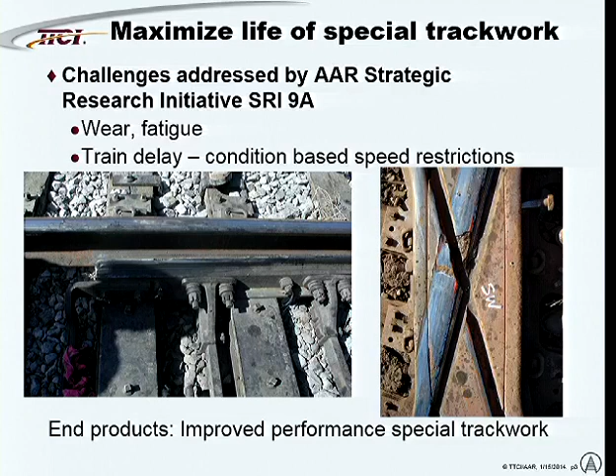On the safety side, special track work is typically the third leading track-related cause of accidents. Number one is typically rail flaw failures, and number two is general track geometry. Special track work is number three typically. And so we see

failures that are related to the operation, the moving parts of the turnout, and then also materials issues. These components tend to be highly sensitive to dynamic wheel load. So this is an area where the railroads do spend a lot of money, typically more than $1 billion a year in the U.S. alone.

Unlike some other areas, the pie is divided up into three main pieces. You have the direct costs of purchasing new components, the capital costs. You also have a large maintenance component. And then in addition, we have a train operations or train delay component, which is fairly significant in this area and may not be in some of the other track component areas.

So in general, spending north of $1 billion, and maintenance and train delay more than half of the total. So just buying the best components is essential, but is not sufficient to have a cost-effective operation.

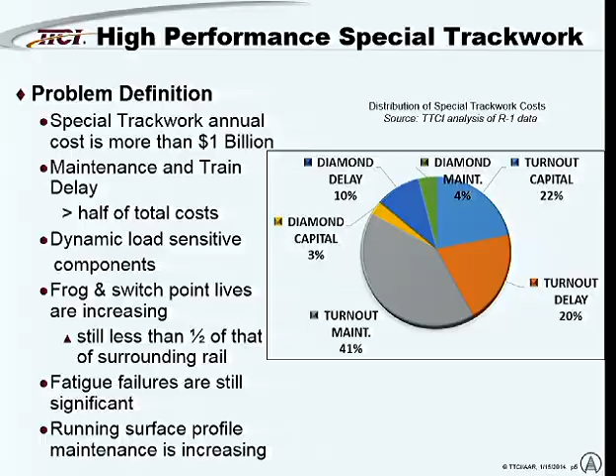So every few years we survey the railroads and we look at how various track components are performing. In this case, we looked at turnouts. And from that, we determined what the major failure modes were at the time. And then we began to address those with our research program.

So this is obviously a potential safety risk because a wheel coming along can actually climb that switch point, and the flange can get in that notch and more easily climb out, causing an accident. So this is a major issue for the railroads.

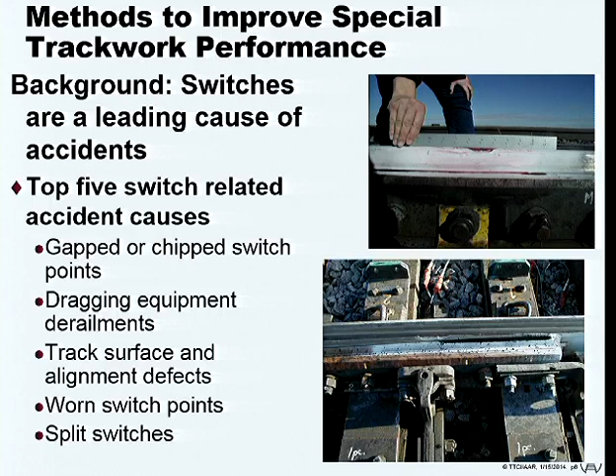And then worn switch points, again, we can get wear so that the contact with the wheel is such that it facilitates a derailment. So there should be wear limits on switches, and those are now difficult to measure in the field. And then split switches. This would be a failure of the operation of the switch to fully close to one alignment or the other. And so that can occur. That's usually a yard type derailment.

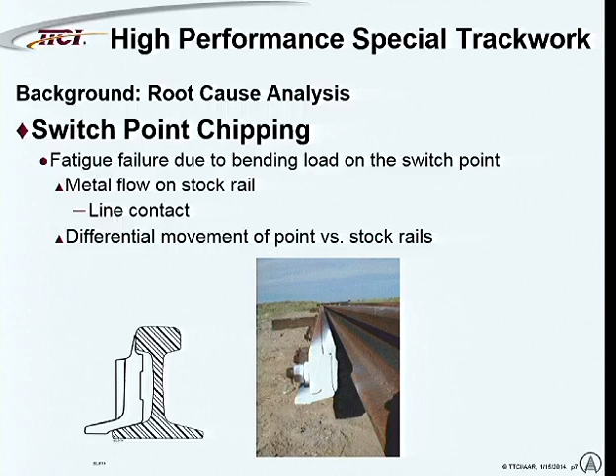Shown in the middle is a great innovation in special track work of many, many years ago. It's a Samson undercut type switch point. So the tip of the switch is a lot thicker. And we've removed metal from the stock rail to accommodate that. But still you can see where this is a delicate component, if you will, for a heavy axle load freight operation.

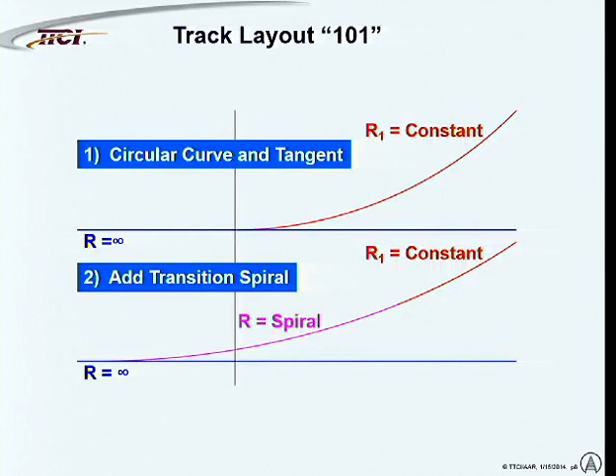So what do we do on turnouts? Turnouts, we do the opposite. We offset the two alignments in North America. The typical AREMA switch has the alignment of the curved portion of the turnout actually outside of the tangent alignment.

Why do we do this? Well, it makes for a much shorter turnout, and it allows the switch point to be robust, thicker, so we don't have to machine something down to a couple of molecules wide. For manufacturing reasons of 100 years ago, this was a good idea.

The resultant is that you get a switch that has a kink or an alignment defect, if you will, right at the point of switch with an entry angle that's fairly large. And that large entry angle causes us some issues in terms of performance of the vehicles going over the turnout.

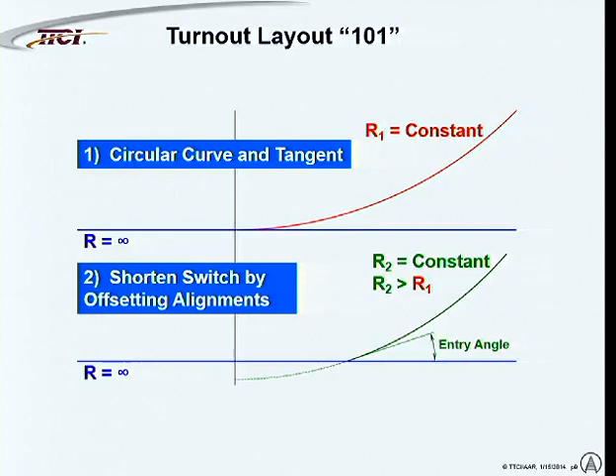Also, in a turnout, we typically don't have super elevation that we would have in the rest of the curves out on the railroad. So for those reasons alone, turnouts tend to perform pretty poorly as far as vehicle dynamics compared to the rest of the railroad.

That results in quick wear and fatigue of that switch point, and thus some of the damage we saw on the earlier slides. We can fix this with better alignments, and that's what the industry has looked at in the last few years.

The sticking point is that, believe it or not, we rate the turnout for speed based on the steady state curving force that occurs behind that entry. If you make the entry angle smaller, you make the radius of the curve behind it smaller for the same length turnout, and thus you have a lower allowable speed, even though it's a better performing turnout.

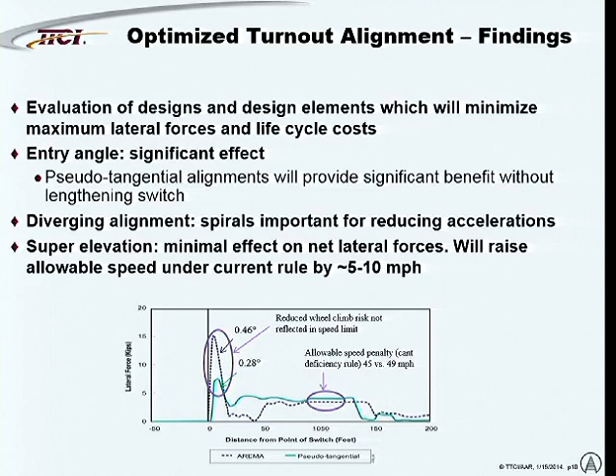So for some regulatory issues, this has inhibited the use of better switch designs and turnout alignments in North America. Our company and the various Trackwork suppliers have looked at how to improve the performance of switches by lowering the entry angle, and various things have been implemented.

Use of spiral geometry, use of the so-called pseudo-tangential turnouts, which follow an alignment just like the rest of the railroad, where the curve and the tangent are aligned, they're tangential. But then you just chop off the end of the switch point when it gets to be a very thin section. Those work very well.

There are limitations, though, that are practical limitations. Shown here on the slide is a number 6 1/4 inch heel spread, which would dictate the length of that switch point. There are practical issues on transporting a switch point when they get to be more than about 60 feet, so we're kept in a box where we can't have a switch point much longer than 60 feet if you're trying to transport it to a remote location.

So there are a lot of design limitations on what we can do, but the bottom line is anything we can do to make the entry angle smaller at the beginning of the switch will provide for a much better ride and typically longer-lived components.

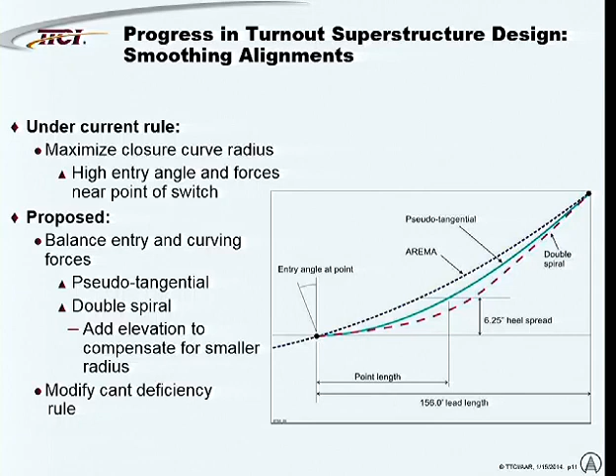We've also looked at revising the stock rail. If you look at switch point chipping carefully, it's really related to deformation of the stock rail, the matching stock rail. So we've looked at ways to revise that profile on the stock rail to minimize metal flow under traffic. We've also looked at revising the switch point running surface profile to make it look more like the rest of the railroad, having the shape of a worn rail, and that's proven to be quite effective. We've also looked at ways to alter the switch alignment so wheels don't come in contact with the thin section of the switch point. And finally, one that's a little out of the box, we looked at how to eliminate the switch point entirely from the mainline route of the turnout.

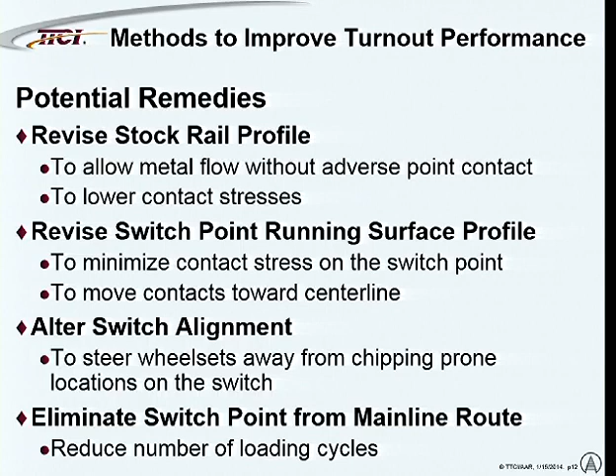A little bit more evidence of that. With the help of various railroads, CSX and BNSF in particular, we went out and measured many worn switch points. I don't know if it shows up too well in the photo here on the left, but that's part of the switch point up there, and then it's broken out from there going forward. It's pretty much all chipped out here. This is in a yard application. We measured many profiles.

Profiles on switch points and stock rail pairs matched up. I've offset the stock rail in this case, but you can see this would be a time series or distance series of switch point profiles on a switch such as this one - I'm not sure it's this one exactly. But the thing we tumbled to after looking at a lot of these is they all break at the same height, all switch points, no matter what thickness it is. And why does it do that? Well, that's where the flow on the stock rail is making contact. So it's really flow on the stock rail which is causing a lot of our issues with the fit up of the switch point and the adverse bending stresses that we see.

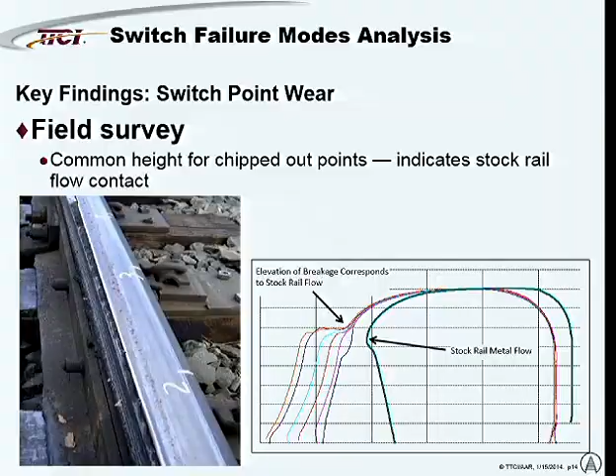So the fix there is to allow some wear in that matchup of the stock rail and the switch point.

We also looked at rolling contact fatigue on switch points. What we see is that typically in this transfer zone, where the wheel is transitioning from the stock rail to the switch point, we get a lot of rolling contact fatigue. The vehicle's trying to steer there, suddenly changing its contact location from stock rail to switch point. So this is a very severe service environment for the steel in this area.

In addition, we have a legacy issue in that switch points were machined, planed from full section rails. They're still made that way, but typically with a CNC type machine rather than a planing operation. But in the good old days, a planing operation made sense, so a simple profile was all they could accomplish. They would basically give the rail a flat top haircut here, giving you this nice flat surface that would quickly deform into something that looked more like the red line on the upper plot there.

In doing that, we're doing a lot of work and removing a lot of material from wear under load. So if we start with something more like this, we see that we have to do a lot less maintenance grinding, and we can delay the onset of rolling contact fatigue - spalling, it's sometimes called on the railroad, the head checks. We can delay that by a significant amount of tonnage.

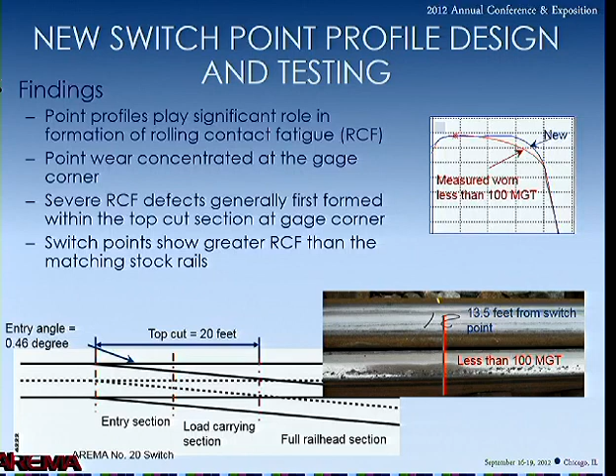And so we came up—we being the industry, our company led the effort, but we worked closely with our colleagues on the railroads, the track standards engineers, and also the suppliers. We came up with a profile that tries to match a worn rail. Most rail sections have a three radius corner by design, and then a 78-degree side slope that matches the wheel flange.

We thought that was a bit much ambition for the first step, so we came up with sort of the poor man's approach to that. We only had to buy one cutter to do this, so we came up with a 1-inch radius corner.

To show you the law of unintended consequences, we gave this sketch to the supplier, the manufacturer at Progress Rail. We said, we want a 1-inch radius, but we want a discontinuity here, however you need to come in and touch grind that to smooth it. Well, they took our instructions and said, oh, okay, we can rotate that 1-inch radius, we can move the center of that curve, and we can actually make it a nice smooth corner. Well, that kind of ruined the design, but they thought they were making an improvement for us.

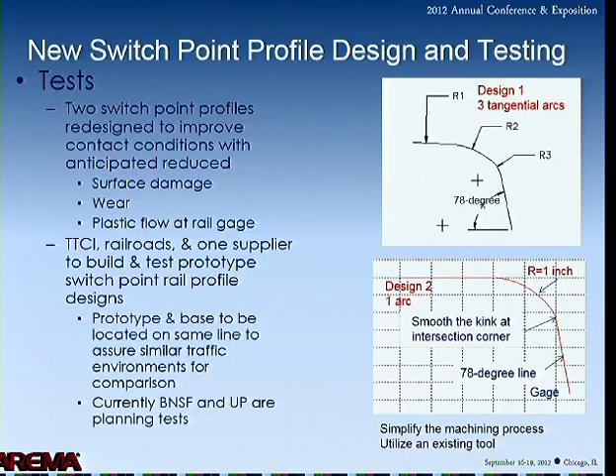Anyway, with the help of BNSF and UP, we were able to make some number 20 switch points and put them in mainline service. So I got to go to some exciting places like Marceline, Missouri, and Bonner Springs, Kansas, to test these out. This is on the Santa Fe Transcon, a crossover, number 20 crossover.

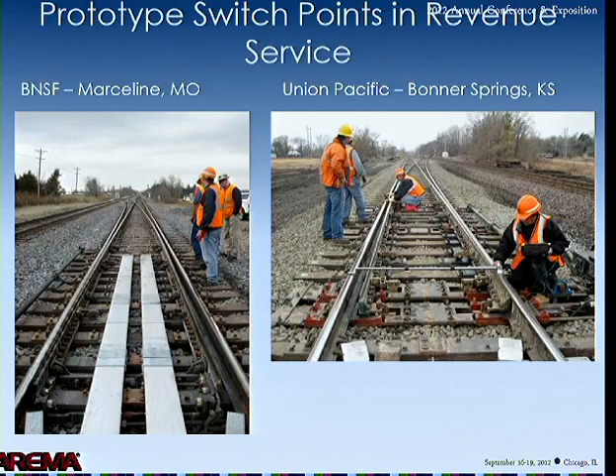This turnout had the revised profile, and the other one had the railroad standard profile at the time. Same thing at Bonner Springs. UP actually put in 2 sets of crossovers, one each with the new profile and their existing design. So we went out and periodically took measurements using a digital profilometer, a MiniProf, to measure how those switches were wearing.

What we found was quite encouraging. Shown on this plot, we've got the new profile, and then after a fair amount of tonnage, 30, 40 MGT probably. And then here, this was one of the standard ones, comparing how it wore over that same tonnage interval. So you can see a fairly significant improvement in the wear on these components. The scales here are millimeters on both axes, and the bar chart kind of sums it up. The prototypes were wearing less than half as much as the standard profiles.

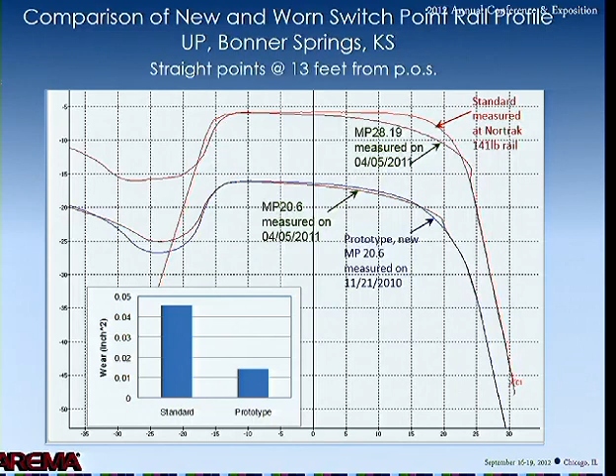Also encouraging, the contact is where we want it. On a typical switch point, it's right on the gauge corner, and that's a very high contact stress. In the new profile, it's on the top of the switch point where we want it, and that causes less deformation, less warping of the switch point under load, and also lower contact stresses.

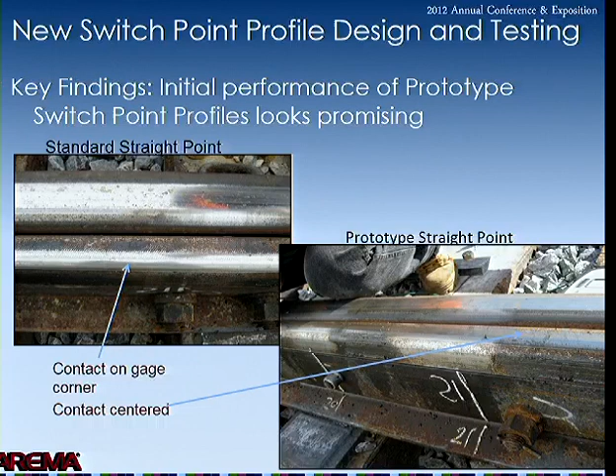The standard points started to show rolling contact fatigue after about 100 million gross tons. I apologize if you can't see it in the picture, it's kind of in the shadow part there where you see the typical spalls—a lot of people call them spalls out on the railroad. And the prototype looked pretty clean in general.

This is not 23 feet back in the switch—this is measurement location 23, which I think is around 14, 15 feet.

Dave, just to confirm, those are both in the same crossover? They're just two different turnouts in the same crossover? They are, yeah. These are the ones on the BNSF at Marceline, Missouri—boyhood home of Walt Disney.

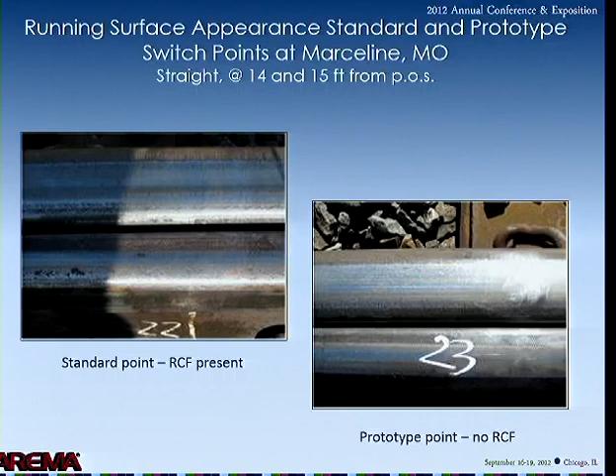All right, so moving on. Conclusions: a simplified profile works pretty well. This was presented at AREMA in 2012. Significant reduction in wear that continues to today—we're out a couple hundred MGT on these now.

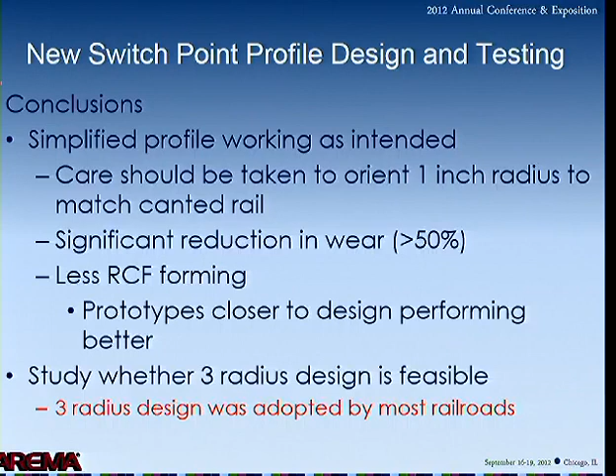The prototype that was closer to the actual intended design worked pretty well. In 2012, the railroads were studying whether the 3-radius design is feasible. The answer is yes, and virtually every railroad uses that 3-radius design today. So that's become an industry standard.

Next, we'll talk a little about vehicle dynamics. So we're looking at ways to avoid the wheel flange coming in contact with the thin end of the switch point. This can be accomplished in several ways. One way we looked at was modifying track gauge so the vehicle steers away from either switch point, depending on which route you're going down.

We were able to do this by lengthening the switch points so we get the wheels on the switch points before the point of switch. Typically a switch point starts at the point of switch, shown here in this drawing. What we learned is that if we get the wheel set on the switch point earlier, we can control it better, and by manipulating track gauge with small changes, we can make the vehicle steer the way we want it to, steering away from the switch point with lower forces as it encounters it.

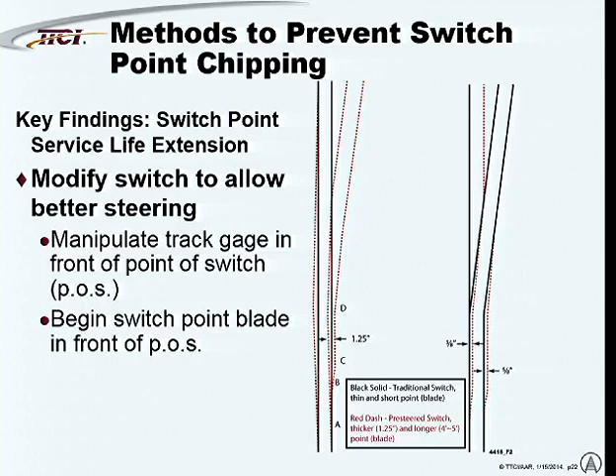Here's a slide I hope will show what we're trying to accomplish. Our wheel set has a solid axle - this is not your car with a differential. So how does a vehicle steer? How does a wheel set steer? Hopefully we have a cone-shaped profile on the wheel, and so the wheel set can steer by shifting laterally within the gauge of the track. We're trying to apply that concept to our turnout.

By moving one of the rails out, we can get this wheel set to want to steer back in this direction to the right, because as that axle makes a revolution, the radius on this wheel is bigger than the radius over here. So for every revolution down the track, this wheel is going further than that wheel - it's steering to the right. By manipulating track gauge in the turnout, we think we can steer away from the switch point tip on either side.

We've modeled this, and then measured the actual performance. Shown here is the modeling. The part we're trying to affect is where the switch point begins, where you see this big lateral spike - this is actually a wheel set angle of attack. The difference between conventional and our design is this little piece right here. We're just barely getting the wheel set to have a negative angle of attack, away from the rail, and by doing that we greatly reduce the wear and forces in that area.

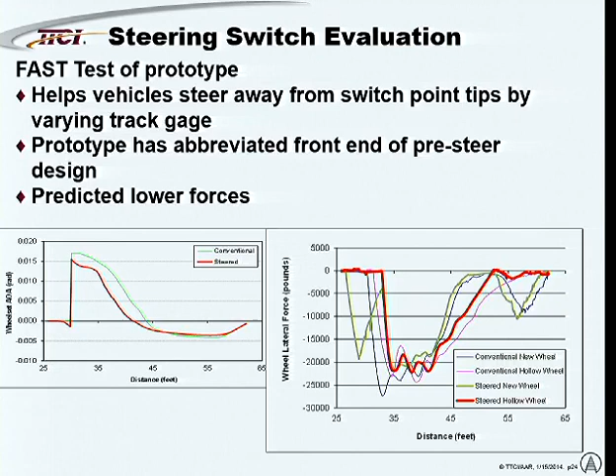The good thing about this is it seems to work for a wide variety of wheel profiles. We're able to get a benefit for the typical worn wheels out in track, not just the new AAR 1 in 20 tread type profile.

So complications - how can this go wrong? Well, the wheel set is doing its own thing, oscillating within the gauge of the track as it goes down nice nominal tangent track with good wheel sets. The individual wheel sets do this, damped out a bit by the truck, the fact that we have two wheel sets coupled together through a truck structure. But how this can go wrong is if our switch point is here where we have a big angle of attack on the wheel, this isn't going to work too good.

If we're here, it can work better, certainly. So we don't see a pure improvement for all wheel sets - some approach a switch with a bad angle of attack to begin with, and there's not much we can do about those. But for the great average, a pre-steer arrangement where we widen out track gauge to get away from the switch point works quite well.

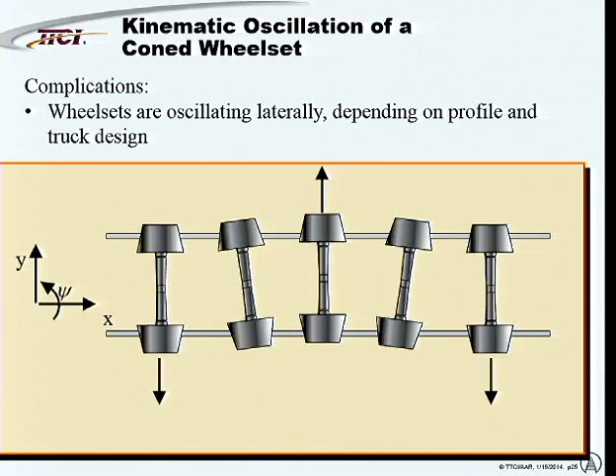We actually built a number 20 and tested it at our FAST facility in Colorado. The good news is we're seeing a decrease in maximum lateral forces. If you measure the 99th percentile, it's about 12% for a loaded car at 40 miles an hour.

The bad news is that we seem to be wearing out the stock rail, so this requires a little more thinking on our part. Perhaps we're asking too much of the wheel set to make this big change in angle of attack. The trouble with turnout testing is we have a sample of one, so I can't tell you for sure whether it was something wrong with this stock rail or something wrong with our design. We think it's mostly our design.

So we are changing out that stock rail. We're adjusting the relative height of the switch point and the stock rail, putting a little bigger point slope on our switch point, and we'll see what happens. So this one is not ready for revenue service, but still looks promising.

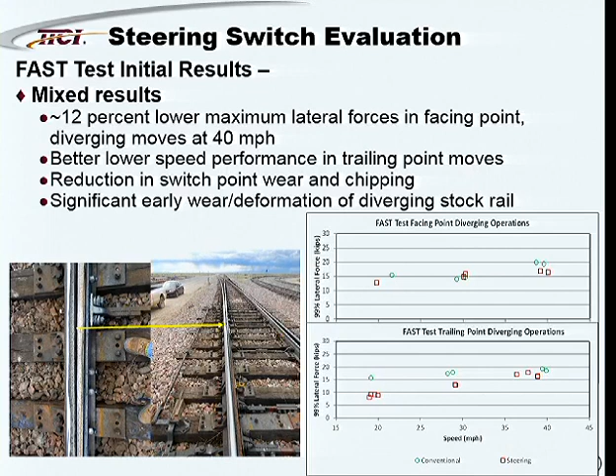If you were at the AREMA Fall Conference in 2013, there was a paper by my colleague Dr. Hsu, myself, Blaine Peterson from voestalpine, and Sung Lee from the FRA. This concept was applied to high-speed turnouts, and they looked at how they could improve the ride quality on turnouts designed for 120 miles an hour diverging.

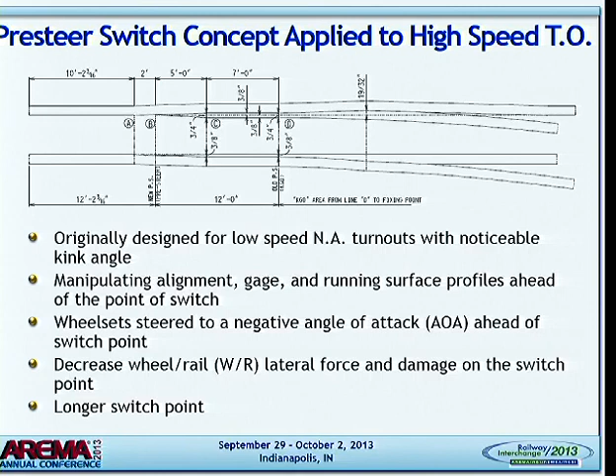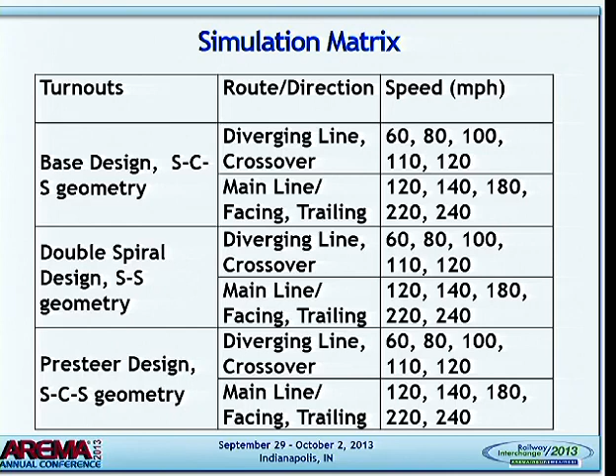They've applied our concept of the pre-steer, changing the track gauge in the switch. They compared several different geometries of turnout alignment, one of them being our pre-steer with a spiral, constant radius curve in the middle, and another spiral out. The takeaway is, yes, you can improve even the best European designs for high-speed turnouts.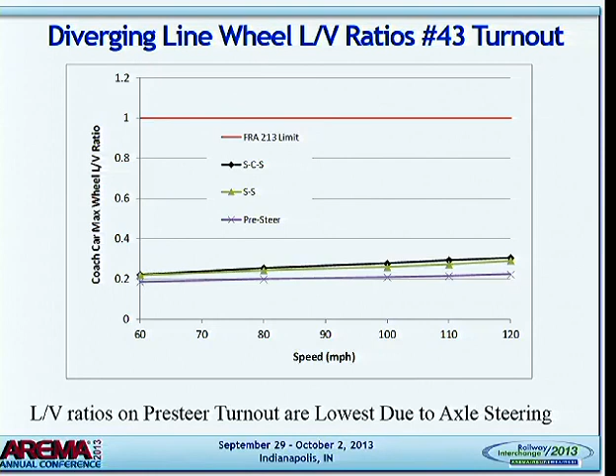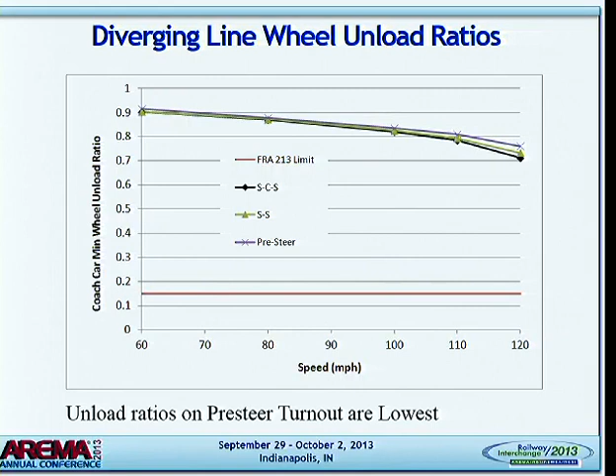Our pre-steer actually does better than the others in terms of L over V ratio, in terms of the amount of load on each wheel, and whether the vehicle unloads as it goes through a curve.

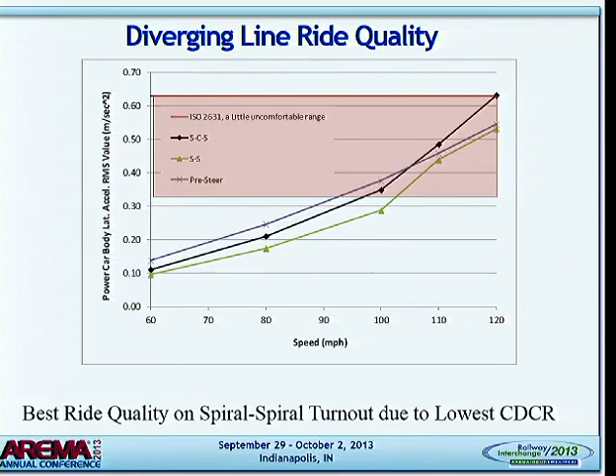This is also a measure of ride quality. So if you're on a high-speed train, don't ride on the power car because you're going to feel a little uncomfortable, at least according to the international rules. But the coach, the passenger coach, has much better ride quality. This is more like a freight car actually, so don't ride in there if you can avoid it.

It also predicts much lower wear on the switch point. So what we're seeing in our freight test, we think would apply also at very high speeds.

The next one is a little bit more out of the box. One way to avoid failure of switch points would be to eliminate them from the mainline route. That's what we've done here with the help of Burlington Northern Santa Fe and Progress Rail. If you see one of these turnouts, you'd think somebody screwed up here, but that's actually the intended design. It's also known as a continuous mainline rail turnout, so the same rail all the way through. We have a lift frog back here, which again the rail is continuous, through the switch.

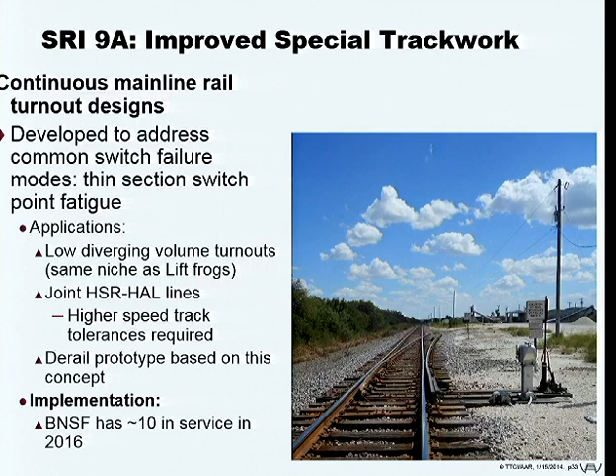So for 99% of traffic, the intended use gives a nice smooth ride, no change in profile, no change in track stiffness. They really perform very well. BNSF now has about 10 of them out in revenue service.

Shown here in the picture on the right is the switch thrown for the siding. This is an aggregate company that makes cold mix asphalt products. They get aggregates shipped in, so it gets fairly high use. But the intended niche for this product would be in places where the vast majority of the traffic is mainline, and an occasional car is put in the siding.

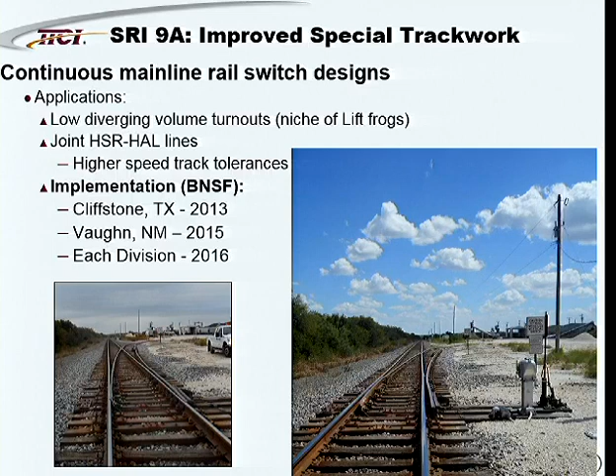It's also known as a vertical switch because essentially the two alignments are overlapping, but they're offset vertically. Hopefully I can show you how it works with some videos here going forward. Again, a niche product - the stock rails are very robust, the ride quality is excellent, and the mainline, our diverging traffic, is limited to 10 miles an hour as a result.

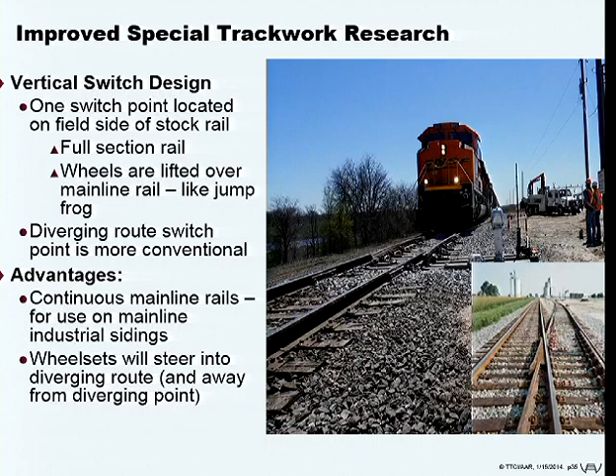This wasn't our great idea, but we steal shamelessly from the past. Here's a catalog picture from the 1920s - this design was actually used in that period of time. I don't think many were still in service in 1920, but they were used quite a bit in the late 1800s. It was easier to make work back then because the rails were a lot smaller, and the wheels were essentially the same size as they are today.

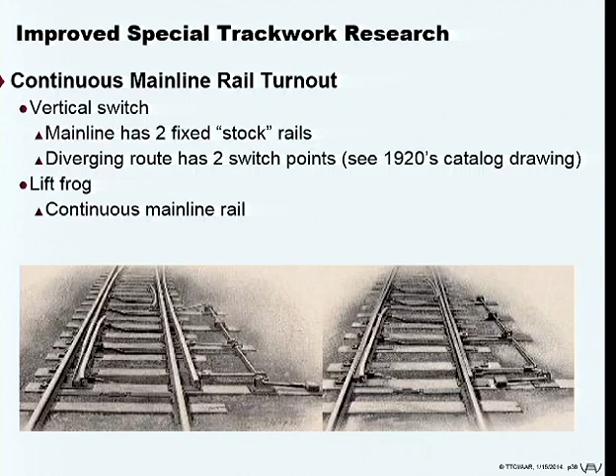So again, how does this thing work? Well, in our conventional switches, we have one switch point on each route, and the two are connected together and they throw together typically. So this is called a split switch for that reason. The continuous rails are on the outside.

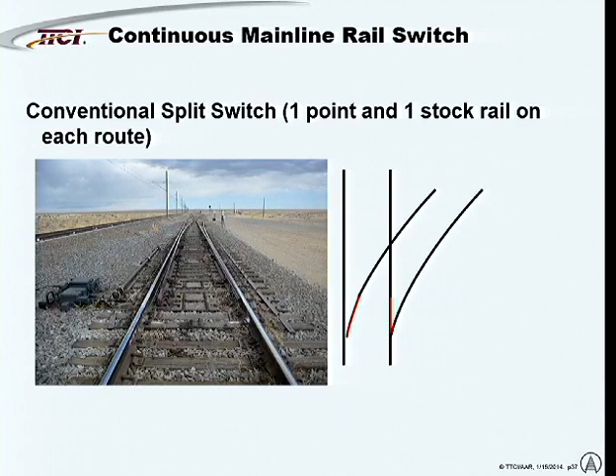This was a prototype that BNSF had built. It was tested at FAST in 2012. Again, the switch points are both on the diverging route, one on the field side, one more conventional on the gauge side of the track.

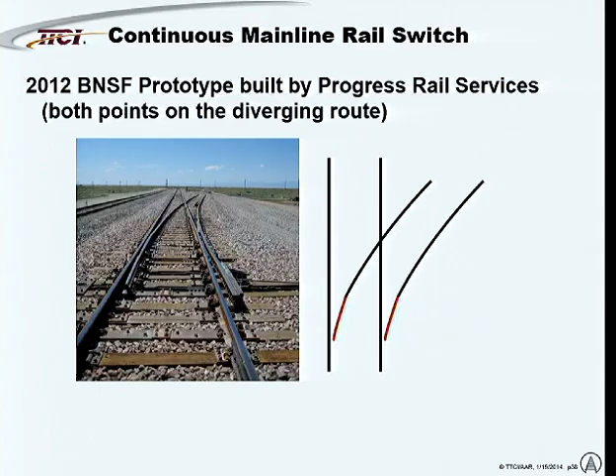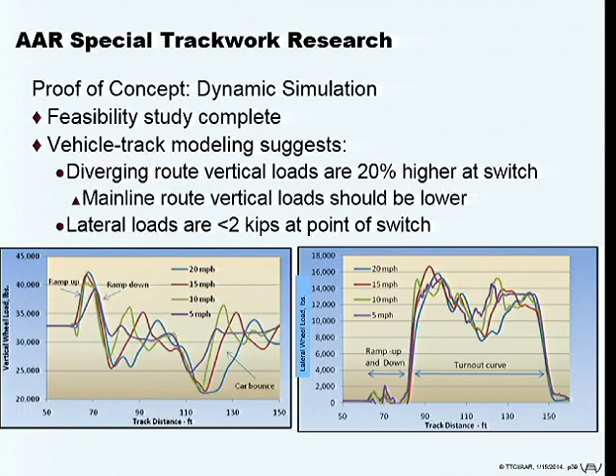So we did modeling to prove whether this concept would or wouldn't work, and perhaps what the limits of application were. So we did our vehicle dynamics modeling. We said there would be a bit of a vertical bump going up and over the mainline rail, and we'll show you some video of how that works. But laterally, it should perform very well, and it has so far. For the main line, it looks like regular open track, with lateral loads less than 2 kips.

So we tested various parts and pieces to see how to do this. The smart people at Progress Rail came up with a good way to do it, and so we adopted their approach, and that's what the railroads are currently using today. We wanted to avoid a situation where we had to machine material off of a stock rail and weaken it, since there's not that much traffic going down the diverging route.

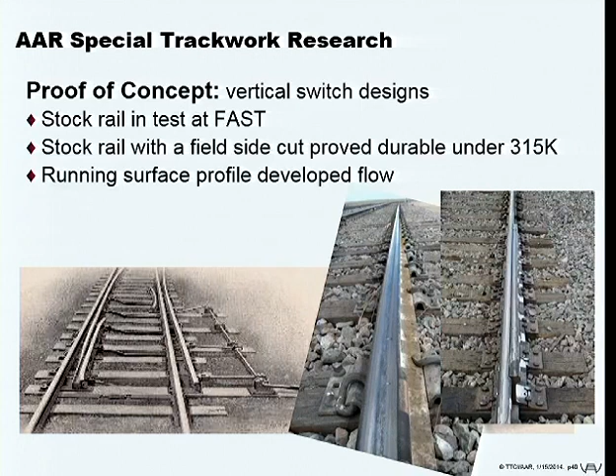So we tested various parts and pieces. We convinced ourselves it would work, and then we, the industry, implemented it. So we'll show you some video of the prototype and test out at FAST at Pueblo, Colorado.

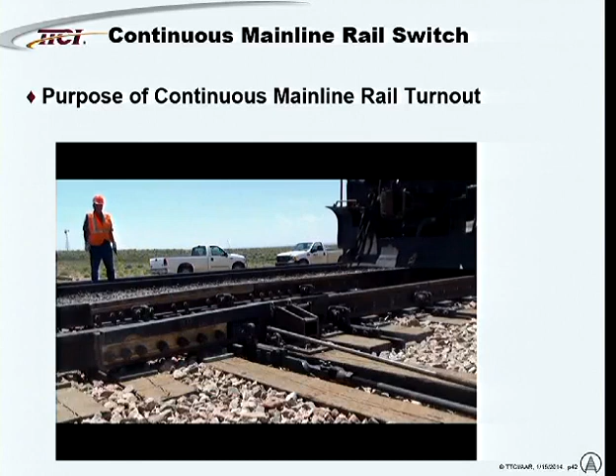So this slide says purpose of the... there we go. Okay, so obviously this was for the executive types to understand what's the purpose of this thing. It's so that most of the trains going on the main line have a nice smooth ride. So that video is not all that exciting, but we'll go on to the next.

So here we've got some vehicles being put into the siding track, into the pocket track. First car is an empty, followed by some loaded 315s. The way this works is that the field side point picks up the wheel so the flange can clear the continuous mainline rail, and then the gauge side point diverts the wheel set laterally into the siding.

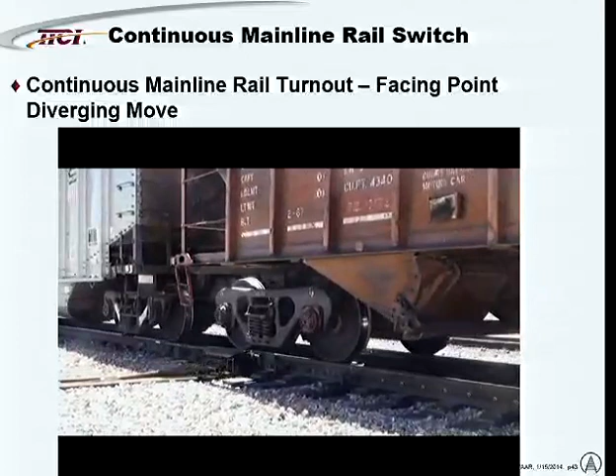Hopefully you can see the trucks pitching as they climb up that little ramp and then back down.

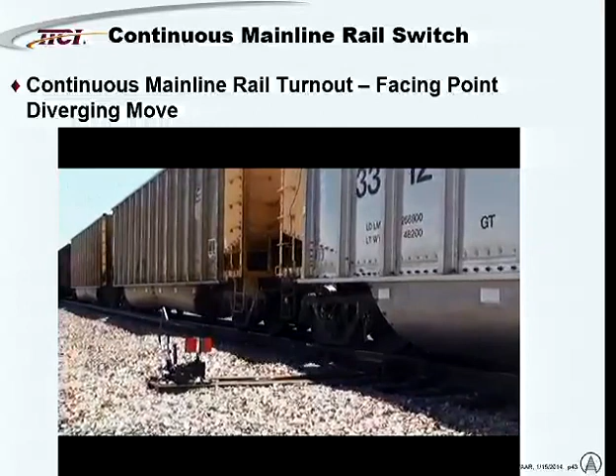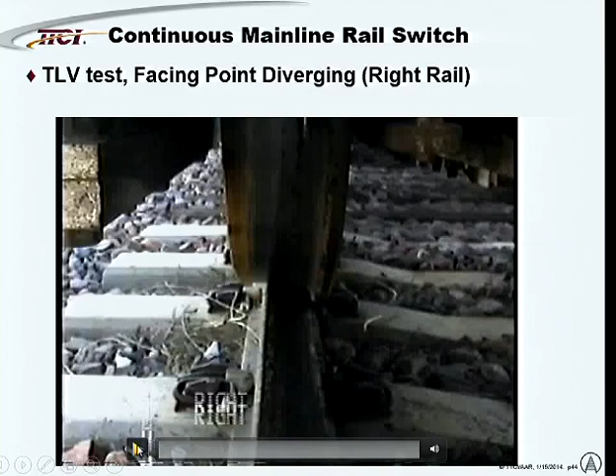Next one, this is from our track loading vehicle. So we're actually applying a gauge spreading load to the car as it goes through the turnout. You'll see again, looking backwards, a facing point diverging move through the turnout. As the video gets towards the turnout, it'll go into slow motion. This wheel set is flanging because we're applying a gauge spreading force.

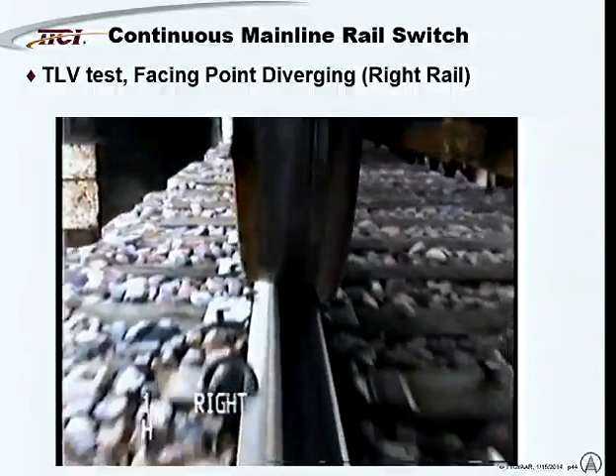We wanted to see what would happen with a bad steering vehicle. So here we come to a joint bar, and then we'll actually go on to the switch. Note how as the flange clears the mainline rail, the wheel set comes over.

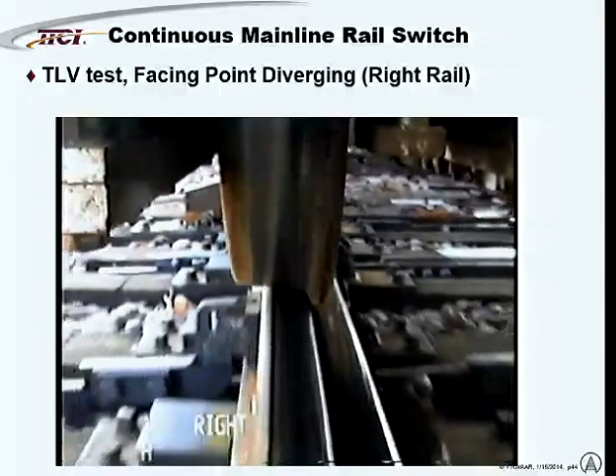So we think it'll work for cars that have bad steering, which is the kind of car you'd probably be putting in a set-out track, one of the intended uses for this kind of turnout.

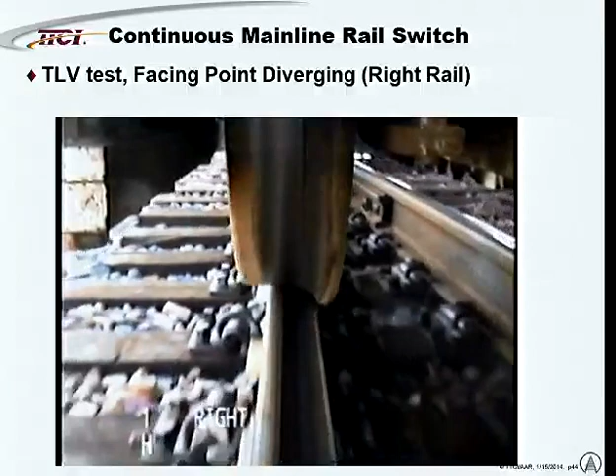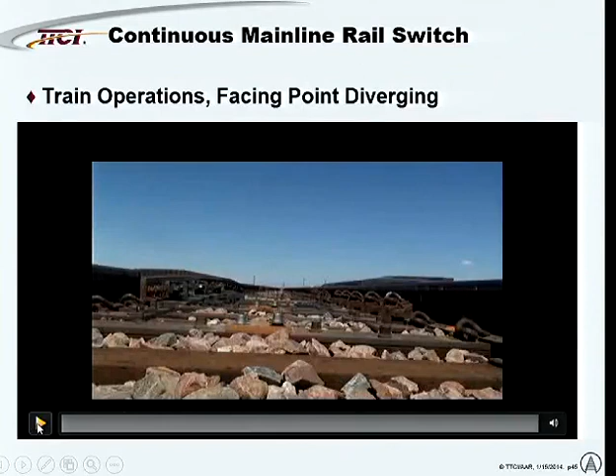And then here's one that shows the vehicle essentially going over the top of us as we're looking down the middle of the track. So again, if you look at the right-hand wheel, you can see that it's raising up on that switch point till it can clear the mainline stock rail. And then the left-hand switch point has the same ramp to it, and it's the one guiding the wheel down the diverging route.

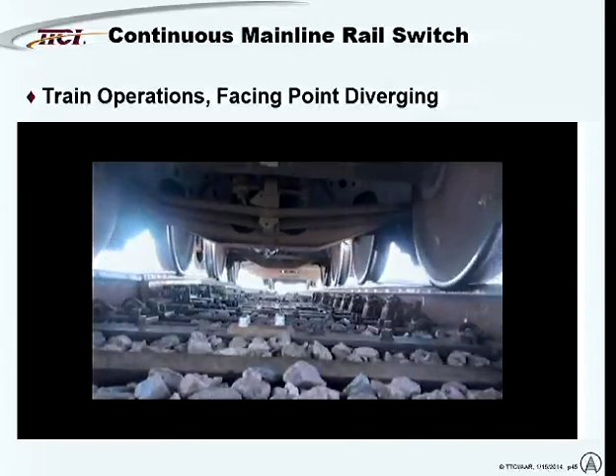Well, it always amazes me when you look at the wheel rail contact that it is a tiny little patch on there.

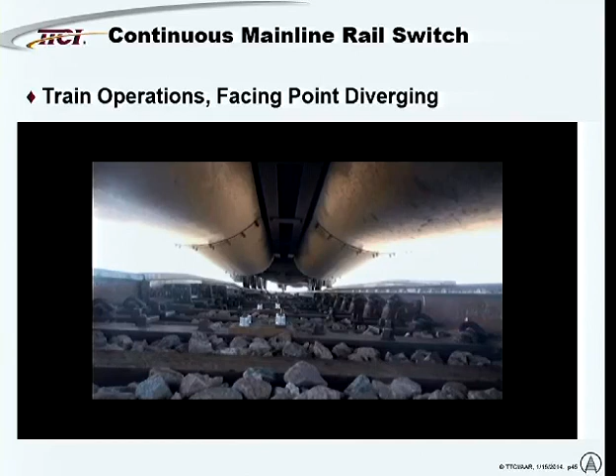Okay, so for the analytical types, we measured forces. We compared it to a more capable number 20 turnout. This is a number 11 on our continuous mainline rail turnout. And the takeaway, as shown on the slide, is that for the diverging route, the lateral forces are similar. The vertical forces are a bit higher as you go up and down that ramp at the beginning, but we're limited to 10 miles an hour, which is our intended use for the diverging route. For the mainline route, it behaves like open track.

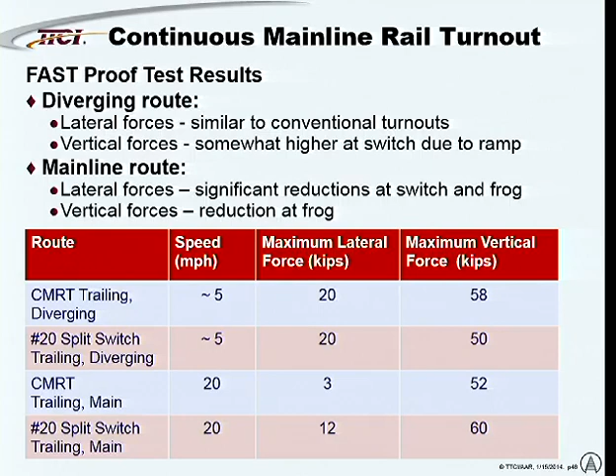And so we get significant force reductions at both the switch and the frog in the lateral plane. There's no guardrail. And vertical forces also go down because we're using a lift frog, a better designed frog that has a continuous running surface for the main. So this is the way to go for those occasionally used sidings off the main.

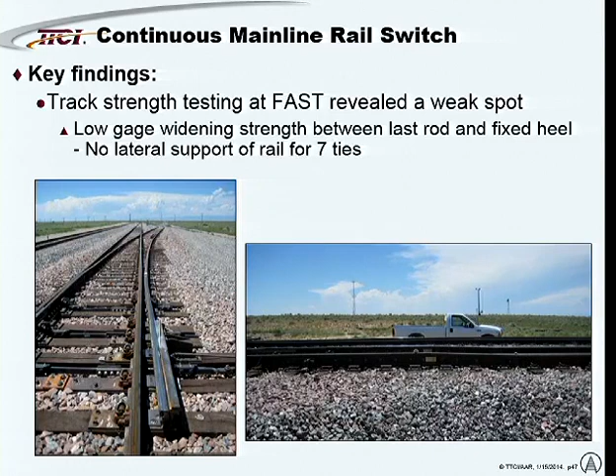Good thing we tested it in a proof test mode at FAST. So anyway, those are some of the improvements that were made to the ones that are now out in revenue service. We also measured wear on the components.

As you can see, these shapes are not very conformal. Hopefully you can see that. It's just a flat top angle, essentially, on that switch point, like an angle bar. And so we saw higher wear, as you would expect. A second order improvement would be to make those running surfaces more conformal.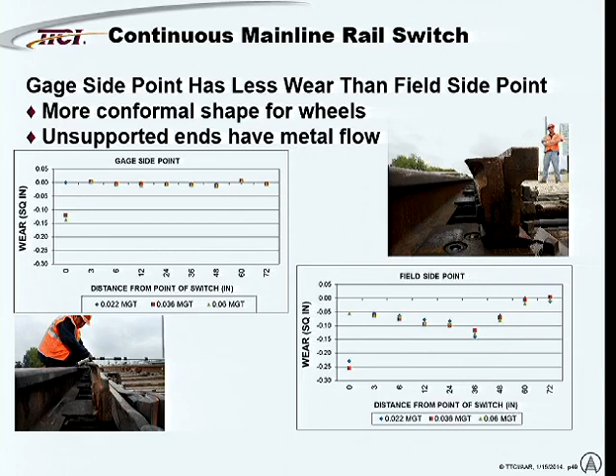What is the practical effect of having that? Probably not much. We do see the wear rates are hundreds, perhaps 100 times higher than we see on the matching stock rail. Oh my God, the world's ending.

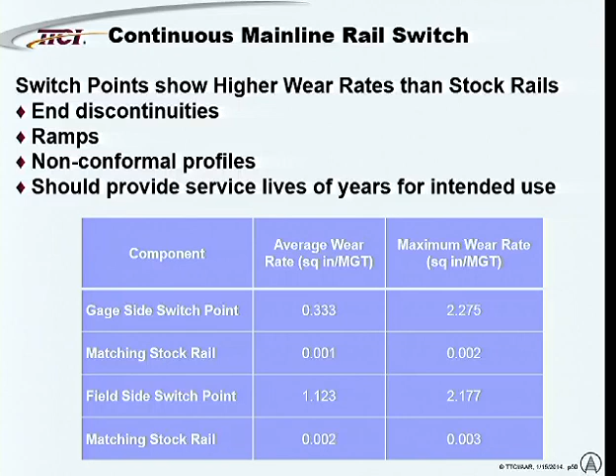No. Again, very little traffic down the diverging side. And so that 100 times more wear, this is a year of wear out on the BNSF. So mini-prof profiles taken in a time series, that's how much wear we have on that switch point. It is 100 times more than the stock rail, but it's almost infinitesimal. It says we'll get a very long life.

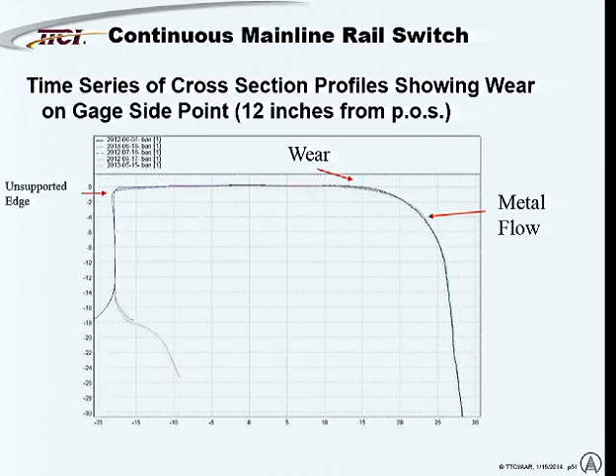Yeah, to say this in another way, you're saying the rate of wear is 100 times higher. It is. But the traffic is thousands of times lower. So we don't expect the wear of the switch point to be the failure mode of the turnout. But again, you cannot apply this to a place where you're going to run half the traffic down the diverging side.

Let me see if I can run the video. This just shows a stack train going at 70 miles per hour over one of these turnouts. Okay, I broke it, sorry. Anyway, it's just a cool video, it just shows one of the turnouts.

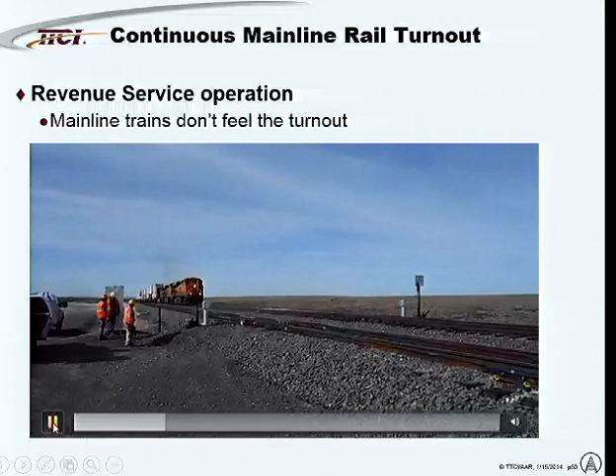So this is east of Vaughn, or west of Vaughn, New Mexico. Hopefully the takeaway is you can see the mainline move looks just like open track. The containers are not rocking back and forth, there's no vehicle dynamics going on. At Vaughn, there's two double-ended set-out tracks. They've been in there about a year, and so far so good, they're performing very well.

Dave? Yes, sir. I remember when, a few years ago, what I'll call the jump frog was coming in, you were doing the research on that. I remember seeing numbers from you that there were thousands of potential applications for those. Are the numbers similar for this, for the switch end of it?

We think it's a smaller market. We do. But along the same sort of applications. We think that the jump frogs actually are more durable because of the material, it's a manganese casting, so the wear rate differential is not nearly as big. I'm also guessing that this switch is more expensive than the conventional, or not? It really should not be. However, they are, because they've only made 10 of them.

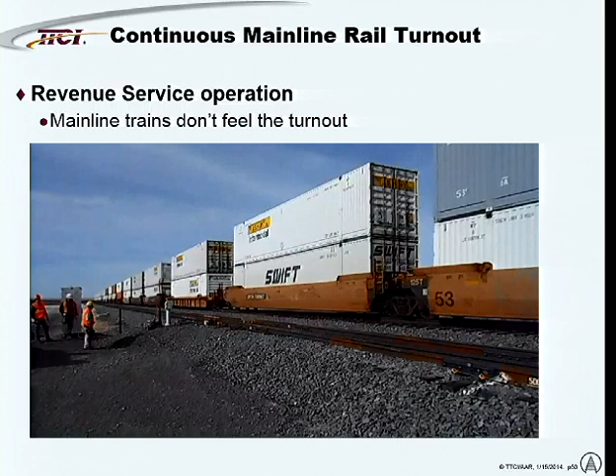Yeah, so they're trying to recover the R&D cost. So we think long-term they should not be more expensive. Essentially what we have is a funny-looking manganese tip on them, if you will, and not much else different.

Okay, next topic. We've looked at how to smooth out some of the stiffness variations in the turnout. In this case, we're looking vertically. Canadian Pacific Railway was kind enough to donate a number 20 turnout to us at FAST for heavy axle load testing, and because they did that, we were able to buy a second switch for that turnout.

And test some of these new concepts. So we worked with pad suppliers to provide pads under the bottom of the concrete, or in this case, timber ties. By doing that, we were able to level out the vertical stiffness through the turnout.

Because as you would expect, as you go back in the turnout, you get these bigger cross ties, the turnout gets stiffer. And then at places like where we have the frog, where we have multiple tie plates covering more than one tie, and we have the extra guardrails and whatnot, that part of the turnout typically is very stiff compared to everything around it.

So this is a picture in the upper right showing the pads on the bottom of our number 20 timber tie turnout that CP Rail donated. And then this is the turnout in track.

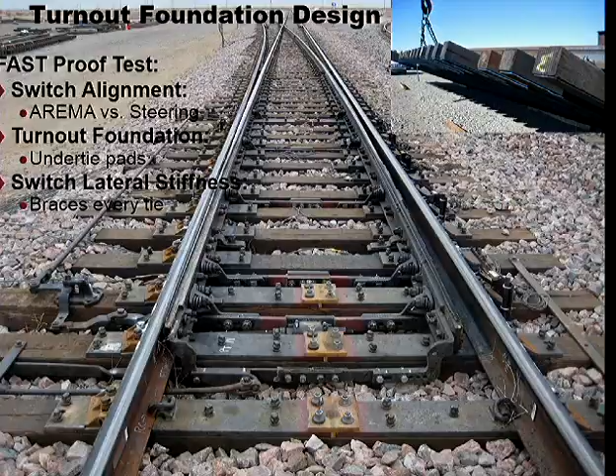We had measured, over the years, the track stiffness around our loop, so we knew it pretty well. And we knew that there were certain turnout design features that created hard spots in the track. So an RBM frog with all the additional plate work and the big casting is typically a very stiff location.

And then also hollow steel ties weren't a particularly good match with timber tie turnouts. The supplier says they are a good match with concrete, and I believe that's probably true, but for timber, it created some hard spots. So we installed this turnout and compared it to the previous turnout, which had almost the same alignment, same design features, except for these under tie pads.

Red is the one without pads, green shows the turnout with pads. So we were able to reduce the stiffness variation in the turnout by a considerable amount. We think that should result in a longer surface life, as well as making all the components last longer. It also will help us in trying to eliminate one of those top 5 switch failure causes of having surface and alignment defects in the turnout.

Dave? Yes. Can we go back to that previous one? So I'm colorblind, so when you said the red, are those the squares or the triangles? The red are the squares. So I guess I'm confused because there's that one peak at about 150. Yes. Well, I guess I misunderstood.

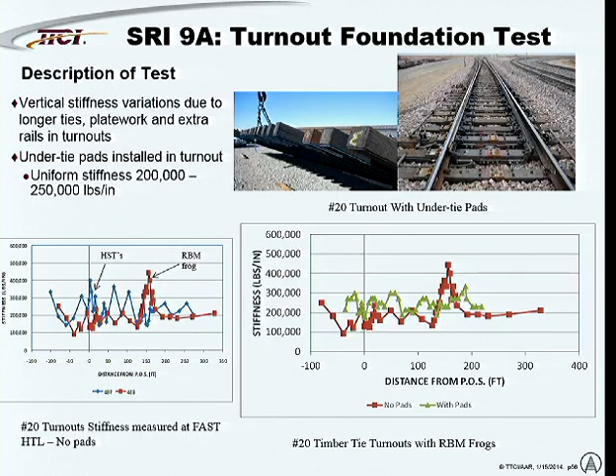So if you looked at the statistics on this, the variation for the green triangles is much less than the variation for the red squares. I'm sorry, I misheard you, I thought you said the opposite. Okay, never mind, sorry. No problem, no problem, okay.

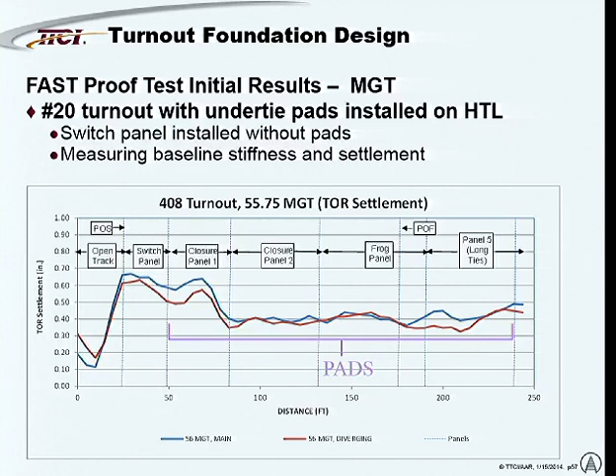This is without the pads, this is with the pads. So the takeaway was about a third less settlement over the first 75, 80 MGT. We've gone out well past 200 MGT, and the settlement rate rolls over as the track consolidates, but this ratio has held. So we were able to reduce settlement by about a third.

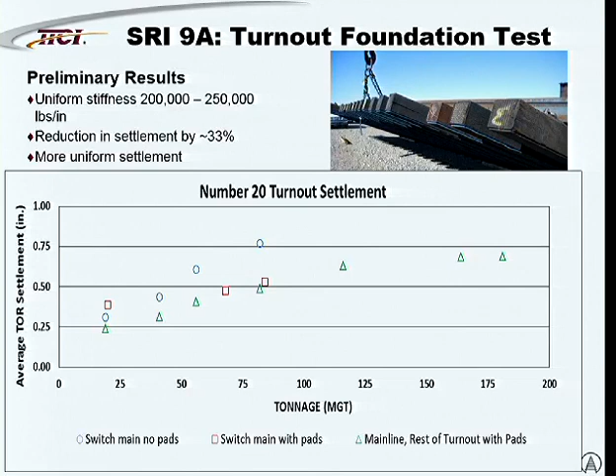We get much more uniform stiffness in the turnout, and more importantly, the differential settlement, tie to tie, has been reduced by more than 33%. It's more like 2/3. And it's that differential settlement that triggers the railroad having to go out and surface the turnout. So this is a big success. The question is, of course, the economics—how long will these pads last? And we don't have an answer yet.

Next, we'll talk a little bit about high-angle frogs and crossing diamonds.

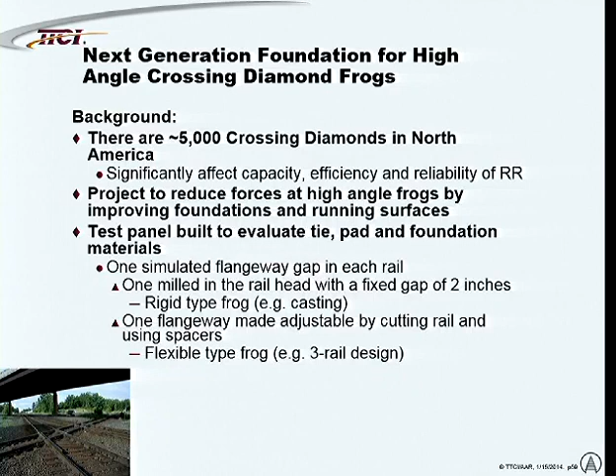We did some work for the Federal Railroad Administration looking at how to affect performance of crossing diamonds by changing the foundation underneath them. That was the original purpose of the test. We built some test panels and ran a series of tests where we measured wheel rail forces.

We also had an idea about the superstructure and how to change that too, so we implemented that as part of this test. We did a lot of side-by-side comparisons where we milled a flangeway in a continuous rail to generate impacts. On the other side, we made something that looks more like a 3-rail diamond, cutting the rail all the way through and applying joint bars and a spacer to keep the gap the same on both sides.

What we found was the cut rail generated much lower forces. So we think we're getting some structural damping, if you will, and some differential movement of those two pieces as the wheel goes across—this side doesn't deflect until the wheel's on it, whereas the other side is already deflecting. At first we didn't believe this; we thought the instrumentation guys screwed up again. So we turned our test car and ran the opposite direction, and we still got the same result. We thought it was something with the wheel sets, but it turns out this actually happens.

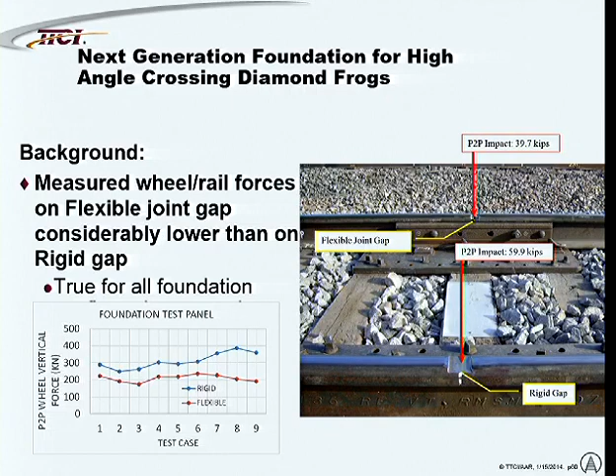With the help of Nortrack and Voestalpine, we were able to take an existing crossing diamond design known as a straight rail reversible casting diamond. This one is unique in that it's kind of loosey-goosey to begin with—it has lots of pieces, and each frog is made up of 4 castings that are all bolted together. So our brilliant idea was, well, don't bolt them all together.

Allow one side to move relative to the other to replicate what we had seen in our previous tests. It works well—works great for the first train, doesn't work so great for the 1000th train. Because as you can guess, if you give it all these degrees of freedom, it's going to pull itself apart. So we want vertical movement, but we don't want longitudinal movement.

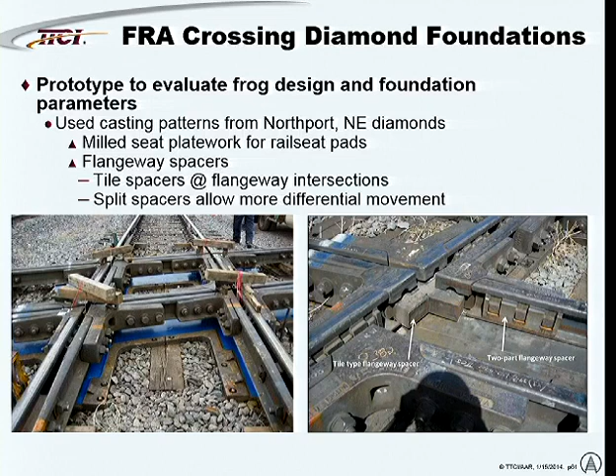So this is a big deal. For the same dynamic loads that the railroad has now at about 20 miles an hour, with these pads you could go perhaps as high as 40 miles an hour. So that's a big deal—that would be reducing a lot of slow orders out on the railroad.